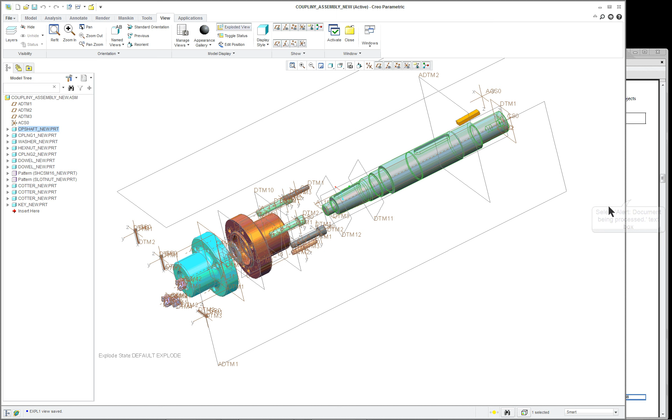We're going to investigate the shaft, the straight coupling, and the taper coupling. First, in this lecture, we'll do just the coupling shaft. All the dimensions are provided for you, but as far as the step-by-step, we'll go over how somebody else approached this project. It's not necessarily the best way to do it. In fact, there are things we'll talk about as poor procedures and maybe not the way you should do it for the correct design intent.

So I'm going to open up the shaft and we'll take a look at it. I'll go to my tools and model player, and as always we'll back it up to the beginning and step through it.

One of the things you'll notice is they did all of this work with one command. This feature actually has too many aspects to it. There are ways to simplify it, and if you don't simplify it, then you should build it piece by piece, and we'll show you what we mean by that in a second. You have the taper here—this is the most important aspect of it.

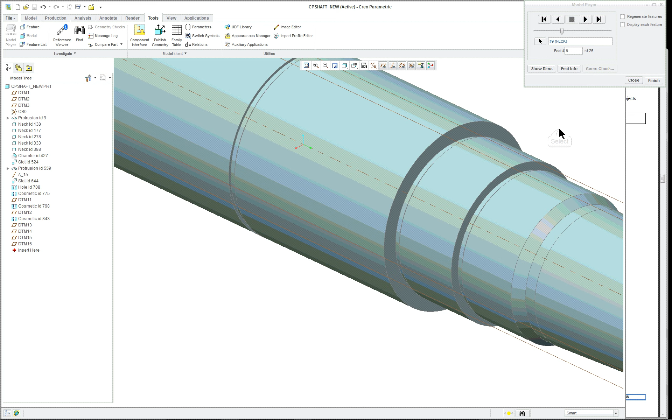So the very first one is a cut called the neck. This is an old style command—it's really just a revolved cut. You can see that was put in here. Same way up in the front here, another neck command. The neck command is really just a fast way of doing a revolved cut. Let's go and refit it. Some of the choices are made for you because it's a default, but we don't have that particular feature turned on, so you won't see that in the commands in the dashboard.

So we have a lot of small items, and then we have this slot that's put in the top. Another cut—this one is a radius actually, a radial cut, kind of an odd way to do it.

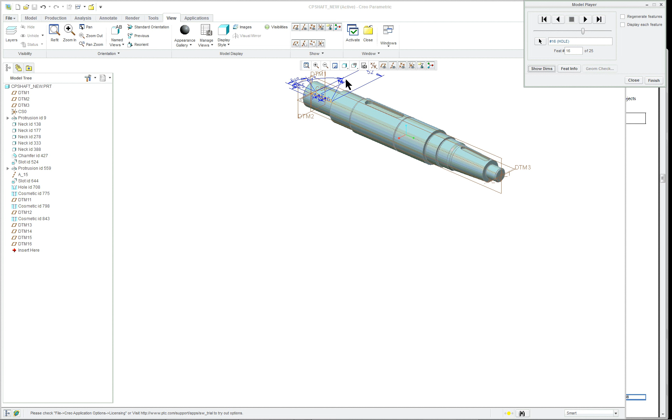And we have our slot here. This will be the one that we have to do a little bit of construction geometry to get. In the back here we have a hole, kind of a complicated hole—you can't use a standard hole here. And that hole has a thread on it.

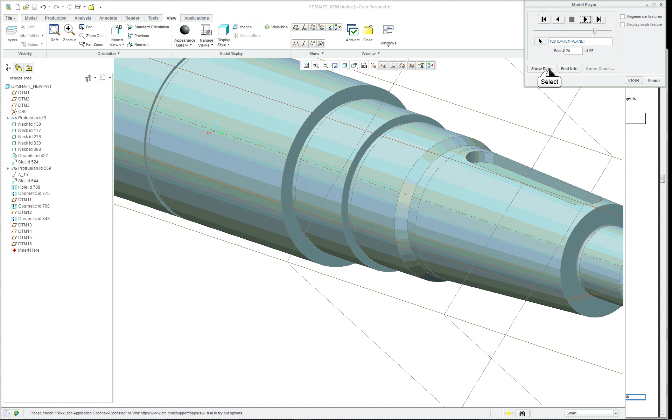We have a variety of other types of cuts and things that we're putting on here. Most of the items are fairly simple, except for maybe the tapered slot here and the hole in the back.

And we have some variety of datum planes that we're putting at the very end. These datum planes are there so that you have the ability to cut sections along the part when you're doing the drawing, and you can see the sections have been provided for you—Section A, B, C—and needed datum planes to pass those sections through.

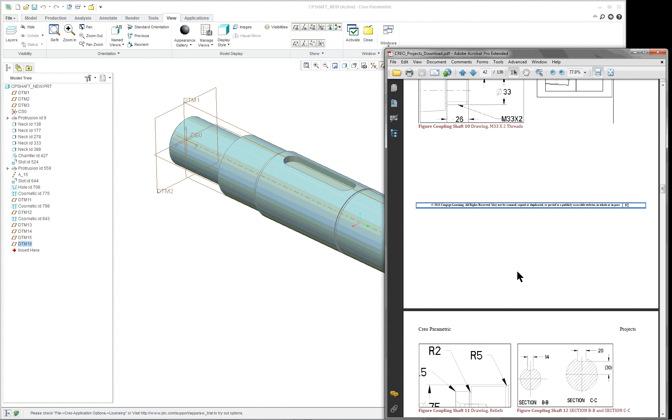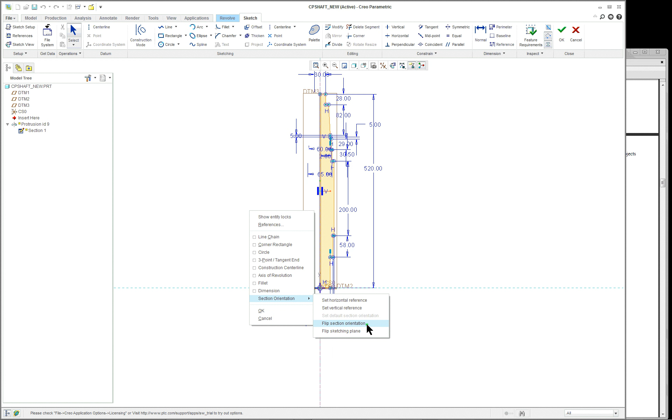All right, so let's look at the first feature. We'll go to the placement, and you'll see this is quite complicated. What we want to do here is turn our section—I have a cold, so I'm sorry about my voice here. We'll click on this, let's see if we can get it to go. Section orientation, set vertical reference—how about this one? All right, and I'm going to close my model tree over here so we can see a little bit better.

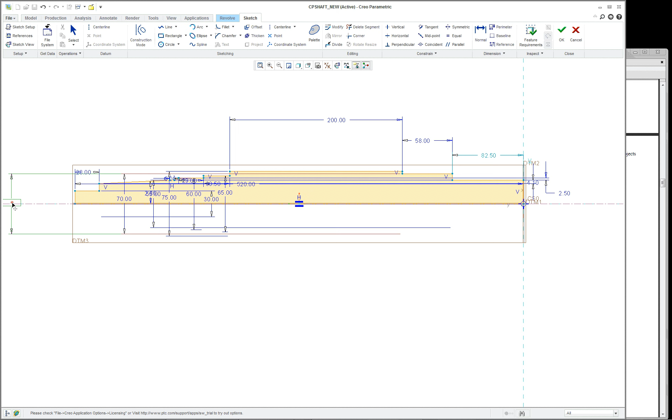Now we'll see we have a lot of diameter dimensions. We do have a lot of stacked up dimensions too, so I'm not saying this is the best way to do it. You're going to have to use these dimensions to create the part, but you also might want to use a better dimensioning scheme and not have so much of a tolerance stack up here. The most important thing here is this dimension, the 2.86—that's one of the most important things. Making sure that this, kind of an odd size to it here, whatever it says in the book, make sure you go by it.

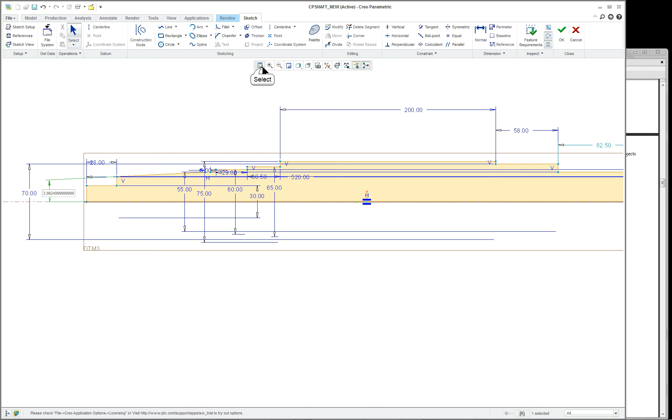And what you want to do is match this angle with what's going to be on the taper coupling. So that's going to be important.

Now, one of the things that people do when they try to do a complicated section is they try to do it all at once. One of the things you can do to alleviate some of the problems, for instance, let's say you started over here and you sketched, but the only portion you finished was... unfortunately, this is all referenced. I wish there was an all, but there isn't. Just trying to back up through here.

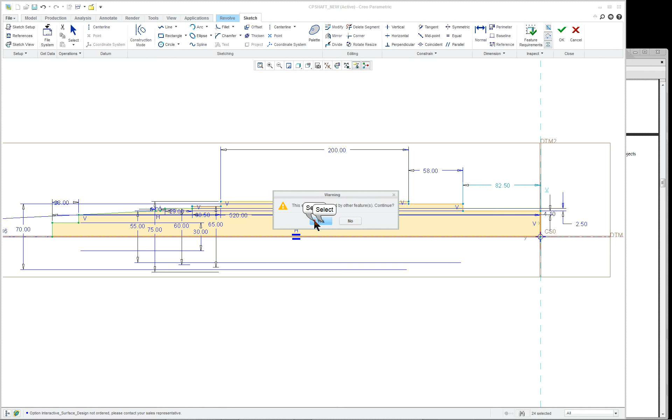And we can see the section here. And I'm going to delete this one. And I'm going to put in from here to here.

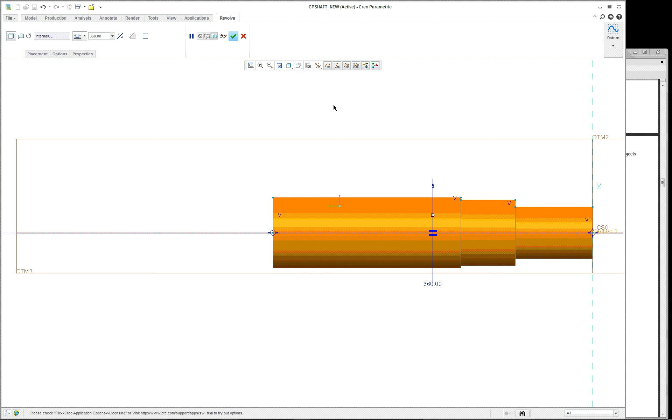Now, the reason for doing this is when you do just a portion of the section, you finish it, come completely out of the command, and then you save it. Then you edit the definition of it, and you do it again. I hate to do that. Well, we can try it. Let's see what happens. So here we are.

And a lot of stuff is not going to regenerate, obviously. But this is what you have completed in the very beginning. So you say, okay, this portion of it is okay. Edit definition, you go back into the section, and then you add the other material on. You continue your sketching. Now, obviously, you're going to have to delete these.

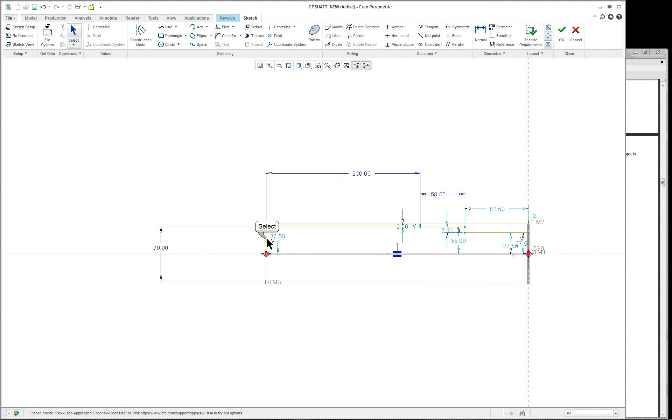So, for instance, I can't remember exactly what it looks like, but whatever it is that you're sketching now, no matter how complicated it is, you finish this off. Adjust your dimensioning scheme as per the requirements of the design. Finish it, and save. Now, what that does is allows you to work incrementally rather than all at one time on a section.

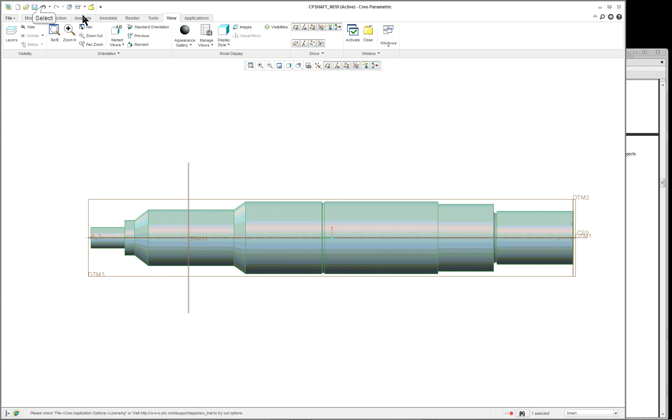So let's see if we can go all the way back. There we go.

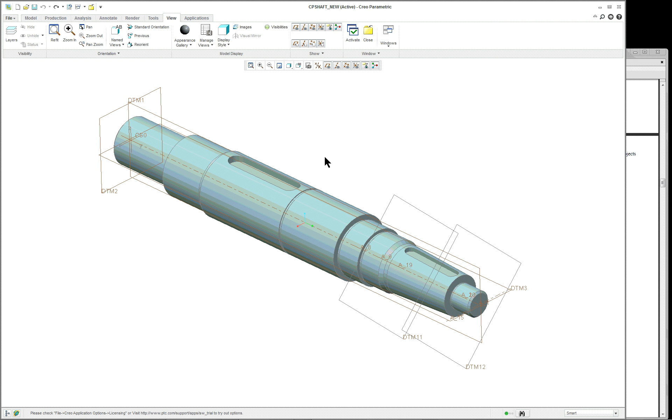You'll notice I have a different default orientation and a standard orientation. And the default orientation is based on isometric at this time, because I set that up in my options. So under model display, I did change this to isometric. After I'd done that, I wanted to see if I could get another good view. So for instance, the view that I created was the default. The default and the standard orientation are the same in the very beginning, but you can reorient the default.

So as an example, if I wanted to, this one is looking this direction. Let's say I wanted one looking in this direction here. And I'm going to go into reorient, and I'm going to click on default orientation and save that. It's going to override the one that's there.

So now I can go Control D, goes into isometric, standard, and then the default it'll go over to here. Let's say this is what I prefer to work with.

So we did the primary feature, the very first feature, most important one in my case. You can see I got a bunch of neck commands in here, which are again a little odd, but we'll investigate some of them.

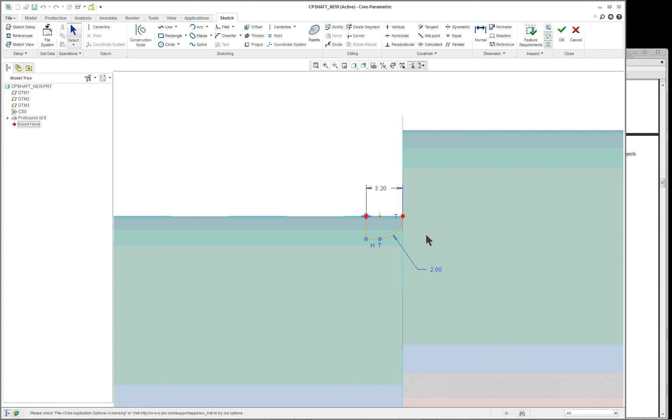So let's go back up here to the very first one, and you can see the neck command comes with some odd menu manager. This is a very old style command, and this is the cut that they put in there. They could have made this as a closed cut also.

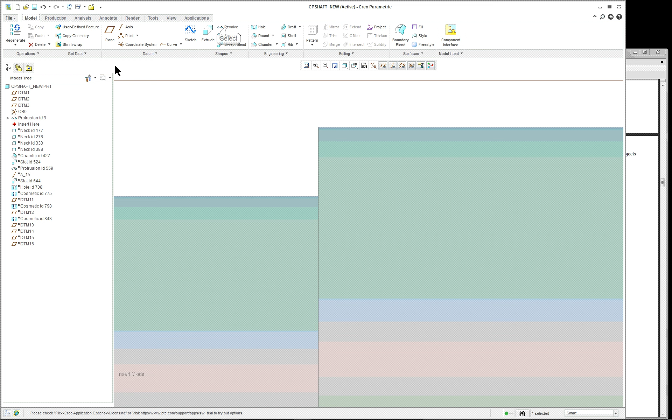So let's just to do one of them, let's suppress that, and let's create a cut. So we're going to do a revolved cut, remove material, and we're going to use the datum plane down the middle here. That's going to be our sketching plane.

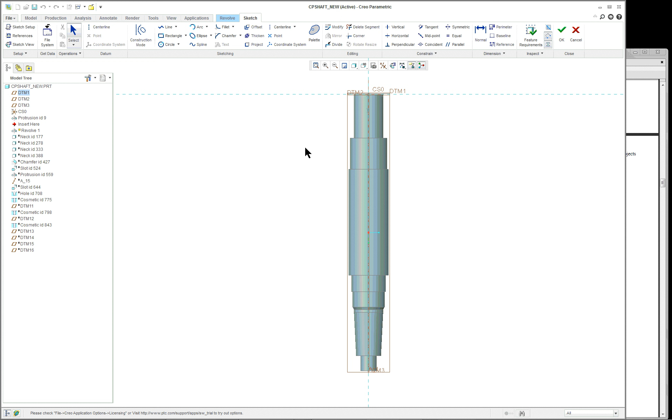Go into the sketch view. I hate this, it's turning it the wrong way for me, at least. Horizontal reference, let's try moving it like this. And to be honest, I forgot where it was. So we'll just do one up in here. It doesn't make any difference where we do this cut.

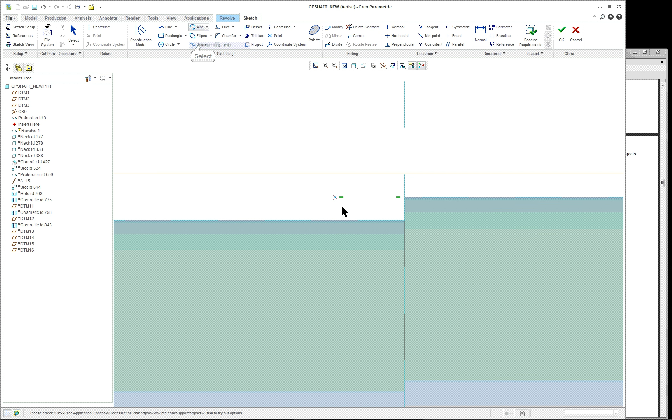So I need some references, and I can select my references, like so. And then I'll need the cut. We'll make a closed section, so I'll use an arc and 3-point. No, let's do an arc and center ends. So center and then end. And then line.

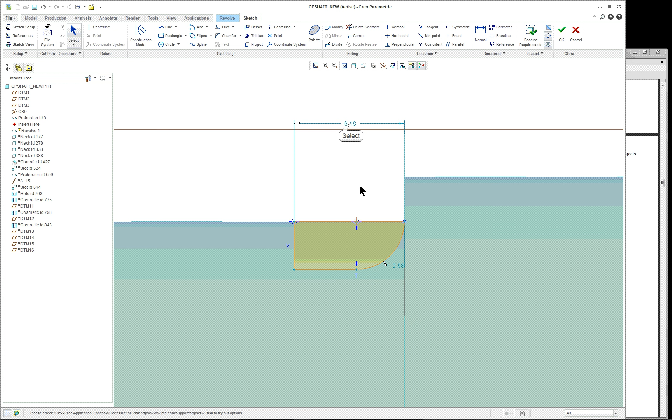And I'll go all the way back because ours will be closed. And you can see that's how we could quickly do our revolved cut. The neck command would have eliminated a couple of those selections for the attributes.

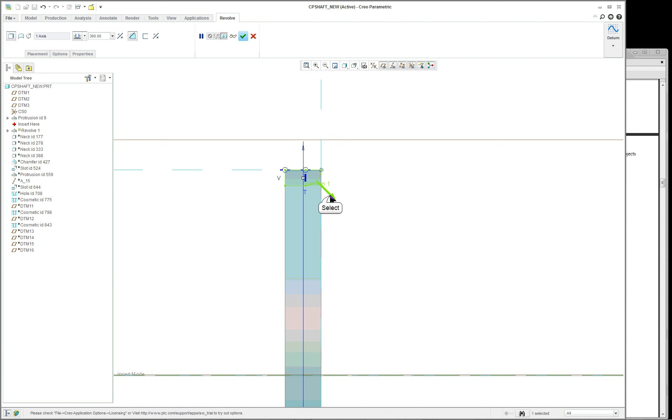I'm not getting it to revolve because I did not do the axis of revolution. So I need this as my axis of revolution. I selected it, and you can see it's going to remove the material. Obviously you don't want to move the material that direction, and that would be the cut. It's relatively simple. You could change the dimensions here, by the way. You don't have to change them while you're doing the actual sketch.

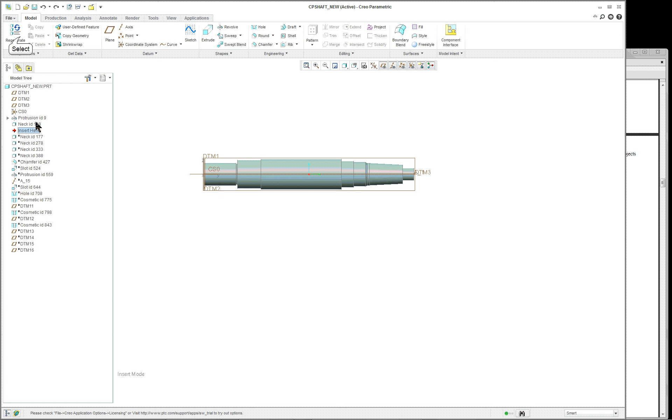So again, let's back that up. Yeah, it was over here, not over here. Doesn't make any difference. So you've got a lot regenerated here. Let's see if I can get this to move.

You've got a lot of different cuts, different styles, but again, they're all pretty much the same as far as your methodology goes. So you use the neck command all along rather than using any revolved cut.

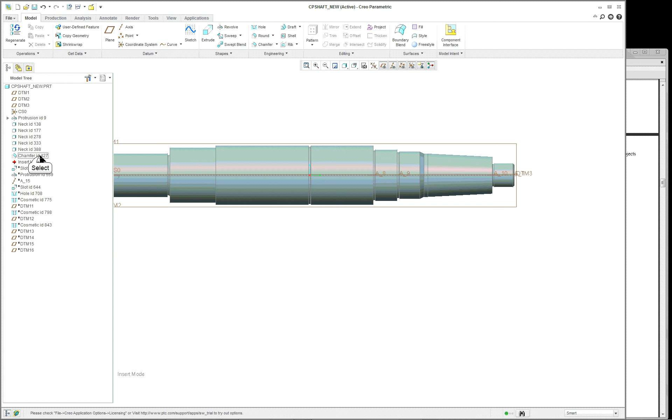We'll go all the way back out to the chamfer, which is at the end here. Nothing particularly important. Now the next one is the slot, and again, this is an old part. Let's look at our file history. We are looking at 1996 again.

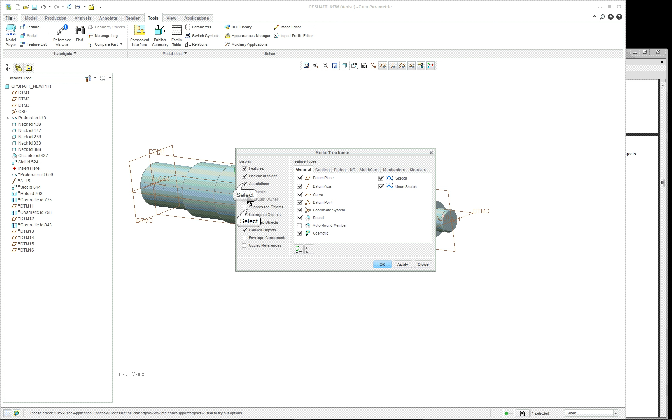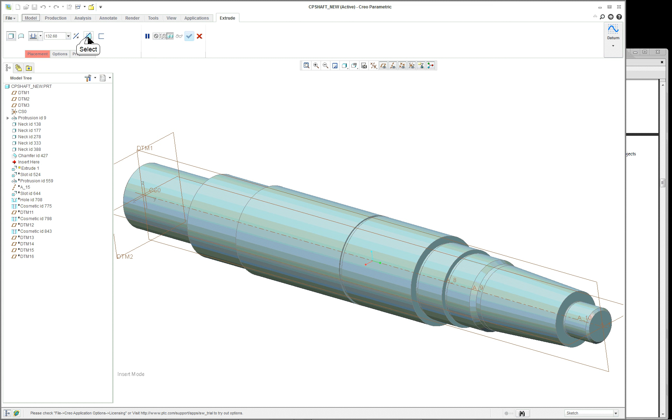So this slot here is going to have some requirements, and one of them is it's going to require that you put a datum plane that's tangent to the position of the slot. Let's turn everything back on there. So let's suppress that. We know we're going to put a slot up here. So the first thing we want to do, we can actually go into the command first, or we can create our datum plane beforehand. In this particular case, I think we'll go into the extrude tool, remove material, and go over here to the datums and put a datum plane in first.

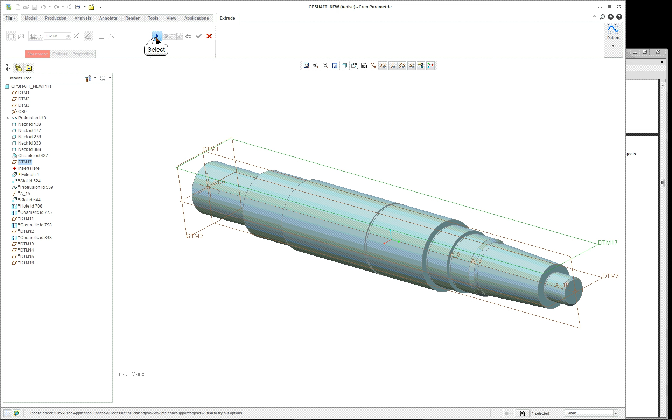So I'm going to pick the surface here, and it says through, and we don't really want through, we want tangent. Then we want to hold down our control key and gather another one. In this case, you could use this one in parallel or this one in normal. Normal came up automatically. Click OK. So that's my sketching plane. Continue with the sketch.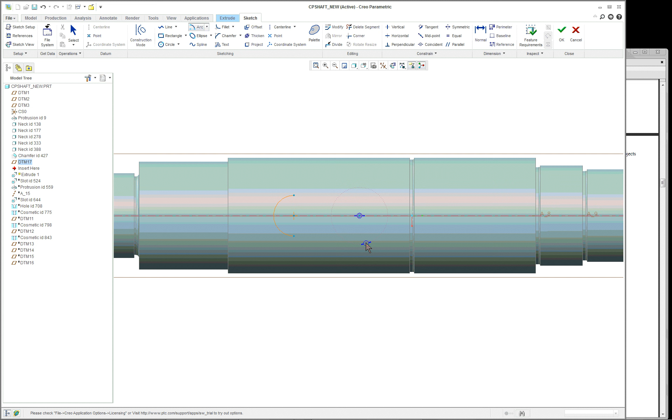And I would put a construction center line down the middle, and then use my arc command. There's a variety of ways of approaching this. You don't have to do it this particular way. You can also use tangent circles, and finish it off with a line.

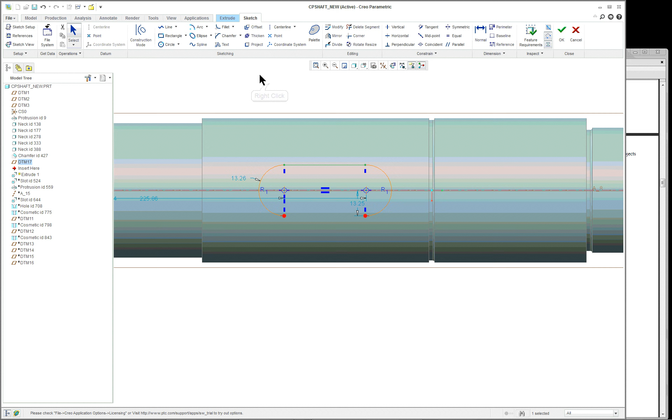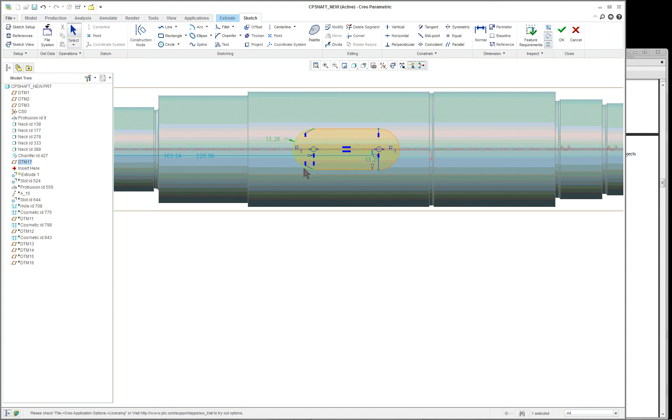Now, if it's not tangent, or the constraints don't work well to control it, then you're going to get some extra dimensions, and it looks like we do have some extra dimensions here. We have a dimension here, which is okay. We have another one over here. So something's incorrect, and you need your distance between the two, so you're going to add a dimension.

But before you do that, you could put your tangencies in there. So that got rid of one of the dimensions. Now you can continue around, but it's saying it's a valid section now.

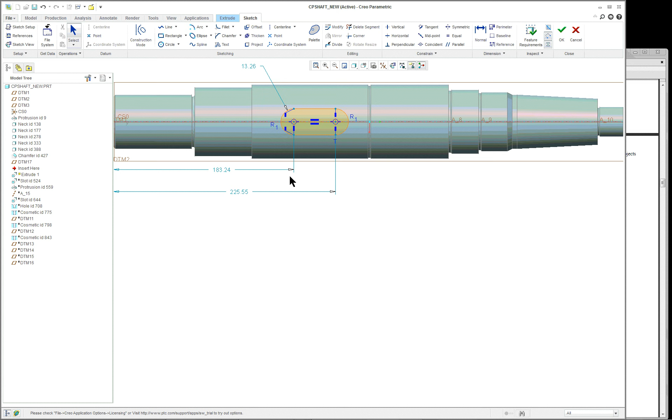Let's move the dimensions out. And again, you'll see, depending on where you're going to dimension from, you probably want the distance between, or in some cases the slot is done from the tangency to the tangency, depending on what type of slot it is. So you could move this around, adjust it, and again, put your proper dimension in there. And you see R1 equals R1, so you only need one of the radiuses.

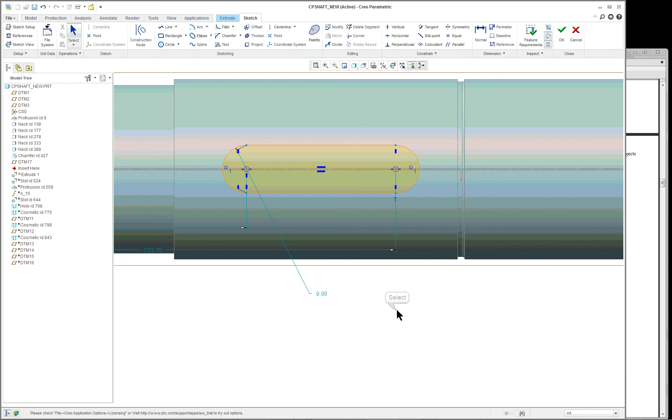Of course, you want to limit how far down it goes, so it's going to be a blind cut. And you're done. So that one's fairly simple.

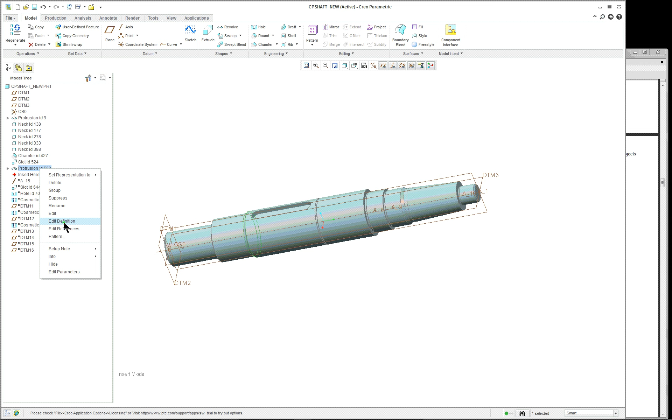I think what we're going to do here is we'll go to our, it says protrusion. Let's see what that one is. Okay, so they added, this is kind of interesting. First of all, I don't think it should be done in this order. If they were doing all the necks, why didn't they do this one also? It's not really a neck, but you'll see what it is.

We'll go into the sketch. It's kind of an odd choice. They put in a section, closed section, with an arc in it. So let's cancel that, and let's suppress it. And let's see if we can find an easier way to do it.

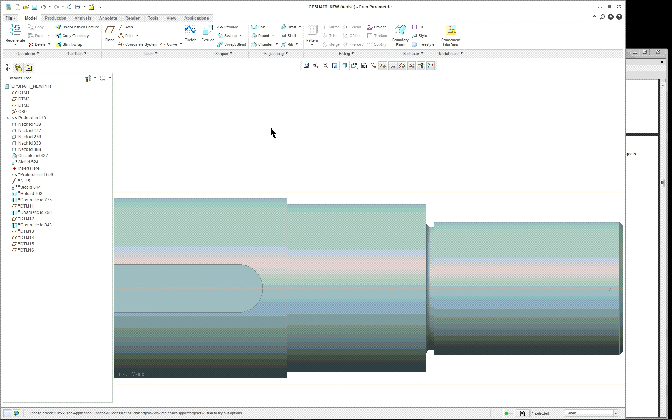Let's go and select our round tool. But this time let's pick the surface, and then the edge. So surface and edge. So that's not going to work.

We're going to have to do a cut instead. Let's try removing this one. So let's pick the edge and the surface. So we got the edge as one reference and the surface as the other.

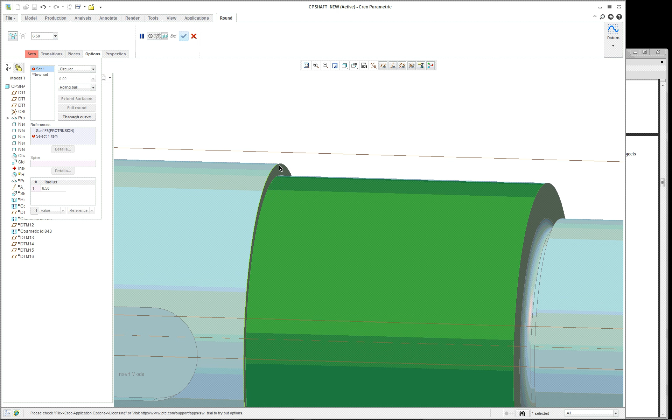So let's do it again. Got your round, look at our sets here. Our references, surface, and surface and surface. I held down my control key, and you see we can actually adjust this. This gives us what we really want, but we could adjust it.

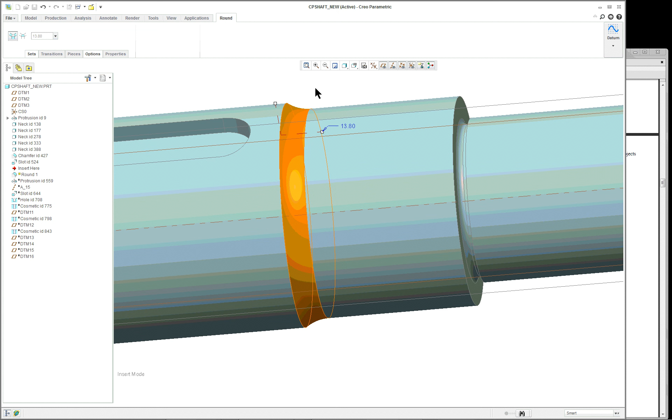There'll be a place where it fails, I suspect. Oh, no, it doesn't, very good. So that would work a lot quicker than the method that they had, which is putting in the protrusion. Now they stuck an axis in here, I'm not sure why or where. Put one at the end. That's a little odd. Again, the methodology, don't have to use it exactly.

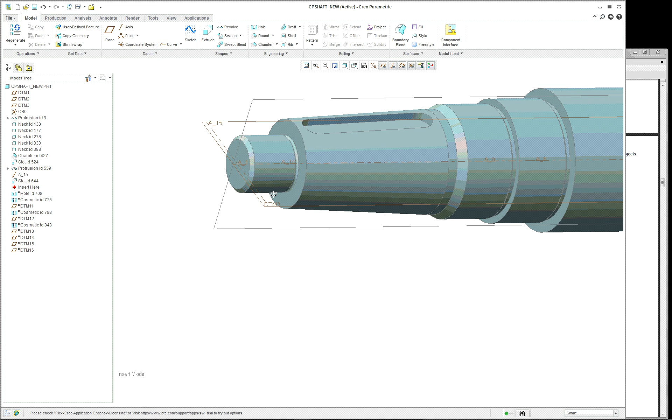Next one is the slot. Oh, they were probably using it for something to do with the slot for some reason. So we have the slot here, and actually I'm going to turn the slot, for some reason I prefer to look at it in this direction.

So let's suppress that. And in this case, let's put the datum plane in first rather than during the command. So we're going to select the surface here. If it's through, we want to turn it to tangent.

We will select, for instance, let's select this one and see if we can just use parallel. No, we want normal, so let's remove that. And that will be normal, 90 degrees perpendicular.

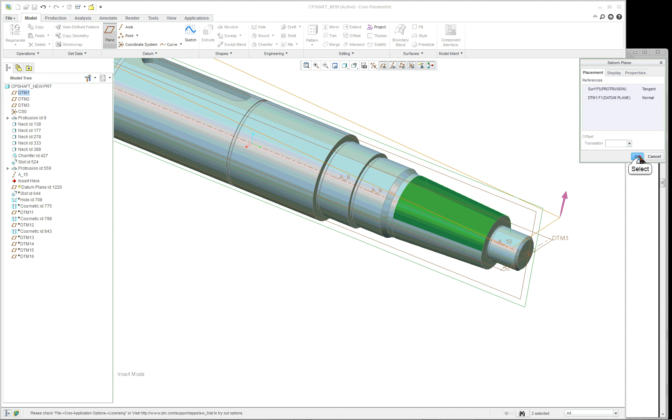You can see the angled datum plane. Now this one is inside, it's external to the command. The other one was inside the command, therefore it was hidden. Here it's not going to be hidden.

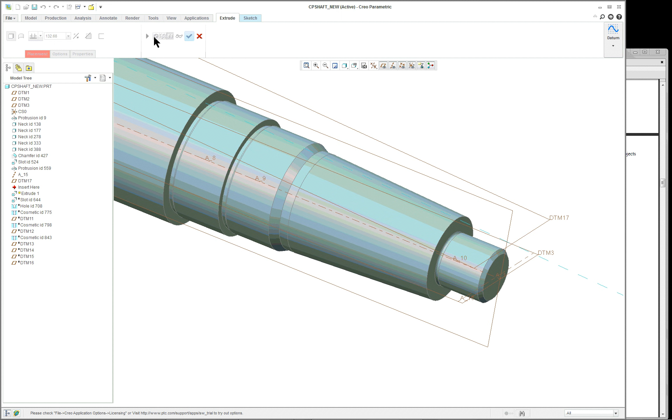So that'll be our sketching plane. We're going to extrude. Actually, by doing it so quickly here on the extrude, you can see I forgot to hit my remove material. So we'll see what happens as we complete this one.

Now everything's at a little bit of an angle because we're looking directly into that new datum plane.

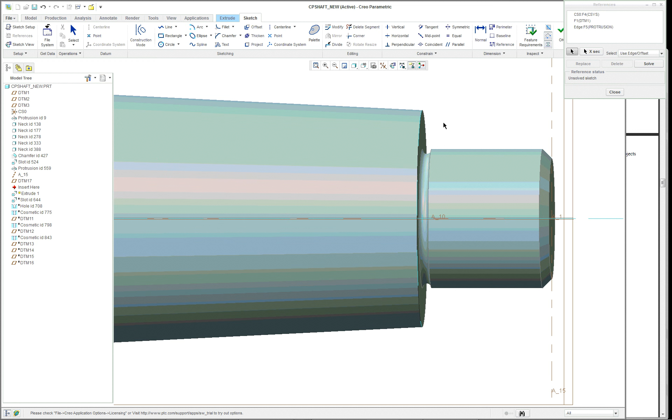We're going to start off with some references. And I want to pick this whole surface as a reference. Right mouse button and pick the edge as a reference also. One or the other will work for us. We've got a reference down the middle.

And let's put in a sketch point right here. Maybe use that.

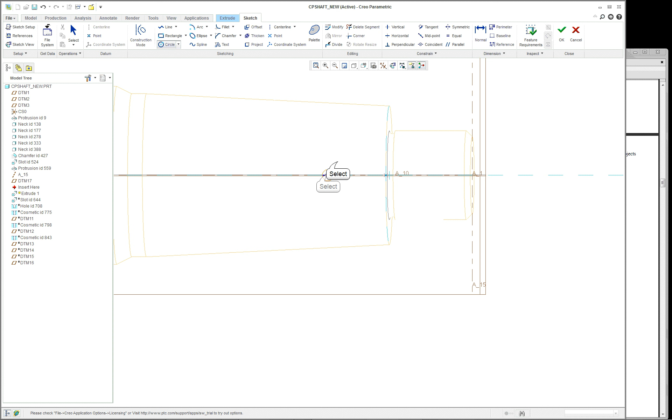And then we'll do our construction, similar to the other one. And we could try something different. We could put in a couple of circles, equal circles, and then connect them with a line. Tangent.

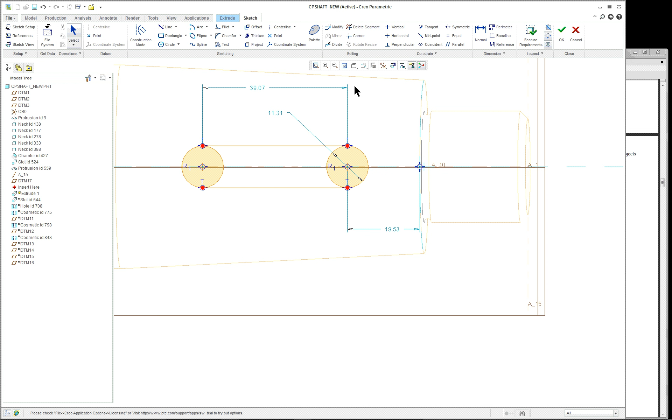Still active. Like so. Then we got to remove this inner arc on both sides. So delete segment, you can draw through this or you can just click on it. Middle mouse button, you'll see that you get that. Now by putting in this reference from the point, it actually dimensioned to it.

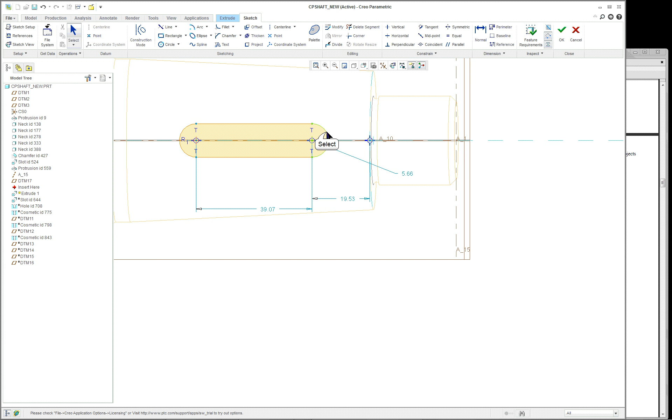If the dimension is not there, then you go from the center to the point here, and that'll be what you need to establish your dimensioning scheme. If you want to go from here to here, you can do that also. So, for instance, you want to go from a point to the arc, and then middle mouse button to place it.

Oh, it gave me that one. It didn't give me the one I wanted. Let's try the other thing. I'm going to delete it. No, it wants it.

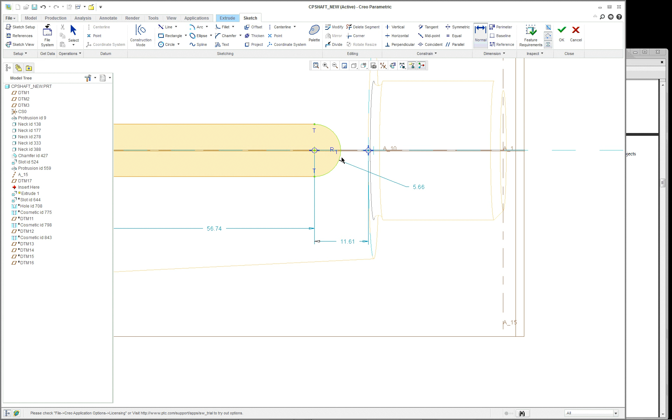So let's go up and add a dimension, and this time let's pick the arc first and then the point. Middle mouse button still did it. I was hoping to get it from this point out here. So I wonder if, well, I'll try one more time.

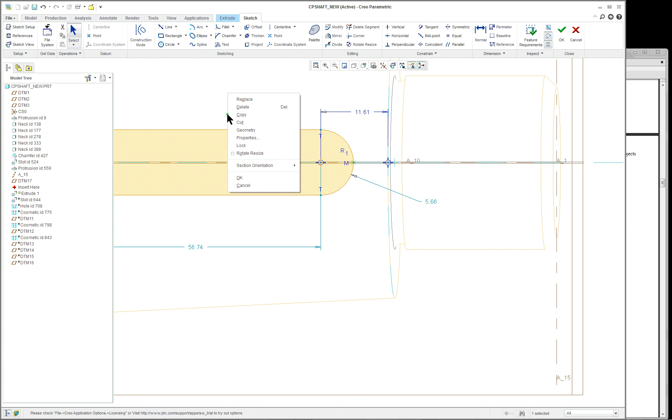Got dimension. I think what we're going to have to do is put a point in there. So let's stick another point right here. And let's put a dimension from point to point. And there's my dimension, okay.

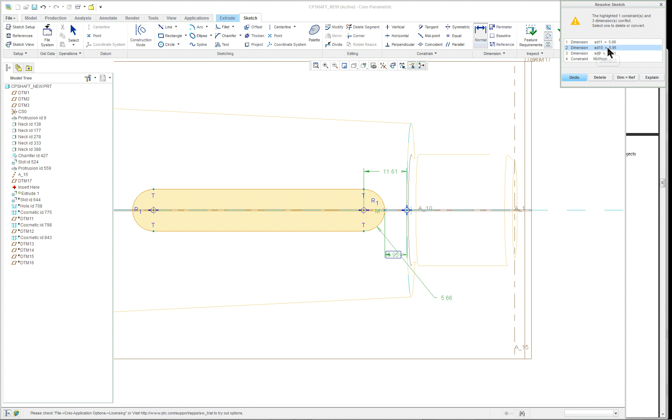Now, if you need a dimension for the radius, you have to add that back in. And it says, which one of these do you want to get rid of? Wants one of these. Oh, they think it's equal. There we go. So we've got too many constraints in here.

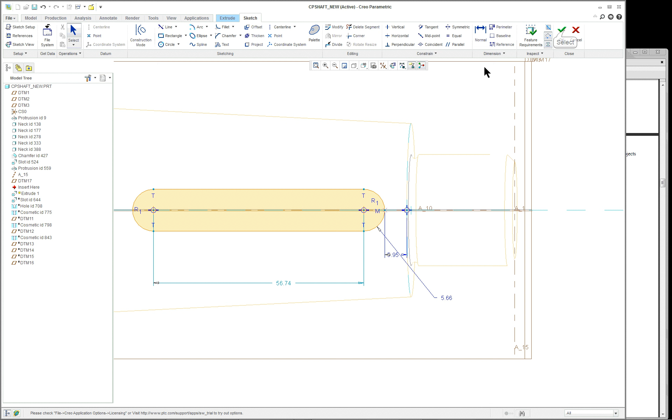R1 equals R1. So here's my radius. All right, now I forgot to remove material. So what happens here? It thinks it's adding. So I will remove material and then bring it down.

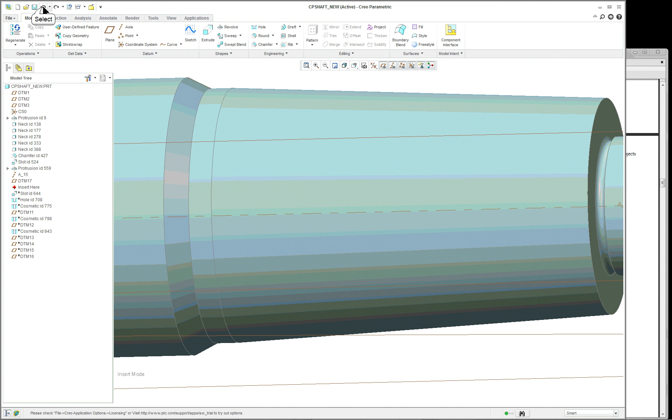All right, undo that one. And activate the hole.

So let's look at the hole. Edit the definition of the hole. And we'll go into the section of it. You can see it's relatively complex. So you have to have a vertical center line or an axis of revolution.

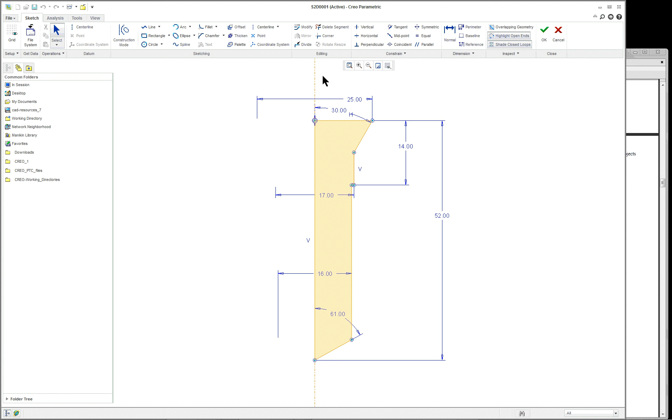Axis of revolution. They changed this. They used to have you put in the center line and then select the axis of revolution. So they streamlined it a little bit. Closed section, obviously, and it's fairly complex.

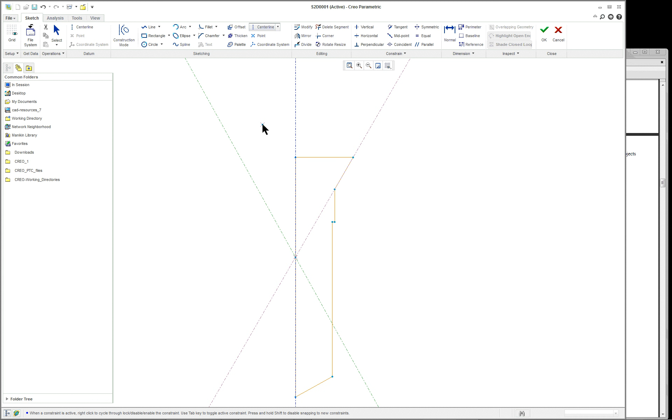Now, the only thing I would say that's incorrect here is that what I would have done instead: I've taken a couple of construction center lines here, like so, and a point, and another construction center line, like so, and maybe one more.

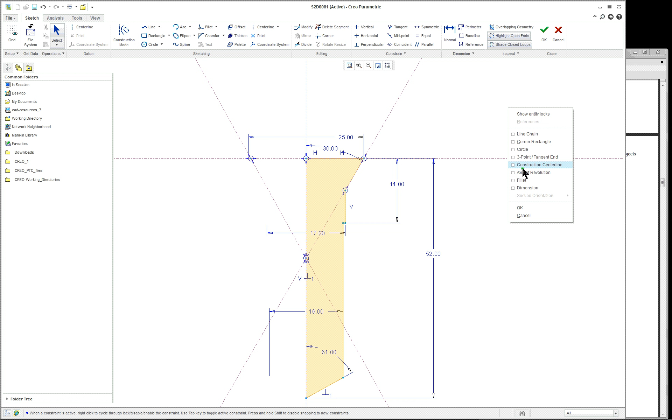And let's put this one down here, like so. And oddly enough, you still have to add a point, like so. So now you got your diameter dimension in there, but if you want another dimension, for instance, the included angle, and get rid of the 30,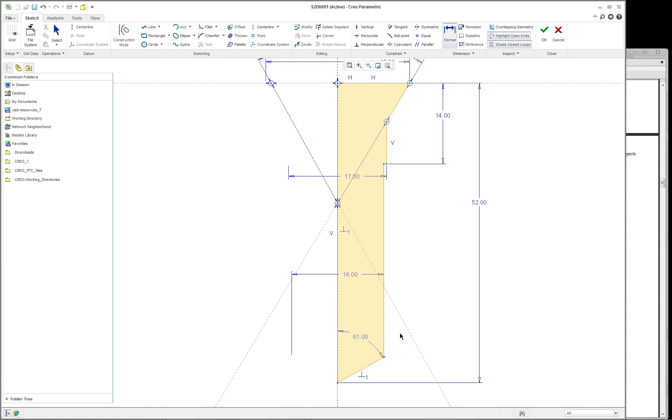that would be a more appropriate. This should be 60, of course. You'd have to do the same thing on the bottom to get that to be an included angle. So it takes a little bit of construction technique, but it's the appropriate thing to do.

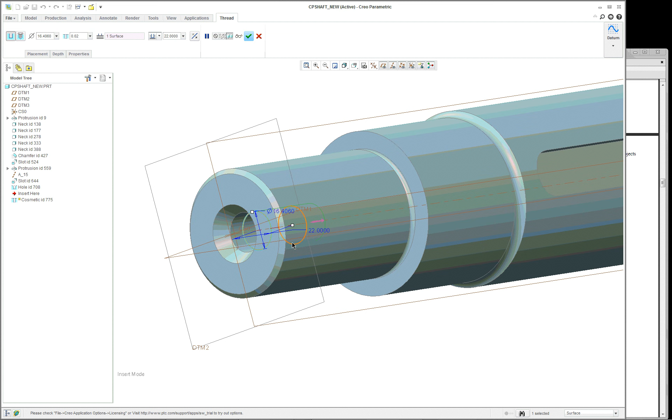Now, you have a cosmetic feature here also. And the cosmetic feature, in this case the thread, cosmetic thread, is only going to go from the lip here a certain depth.

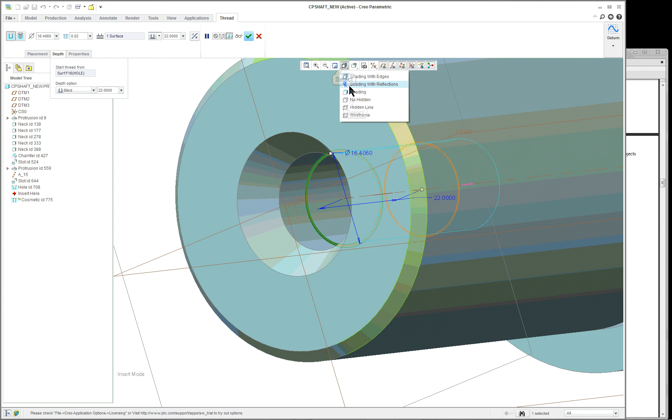So you're going to have to select that where it starts and then depth. So the start from here is this lip here, and it's going to have a certain depth. We go over to our no hidden line. We can see it a little bit better.

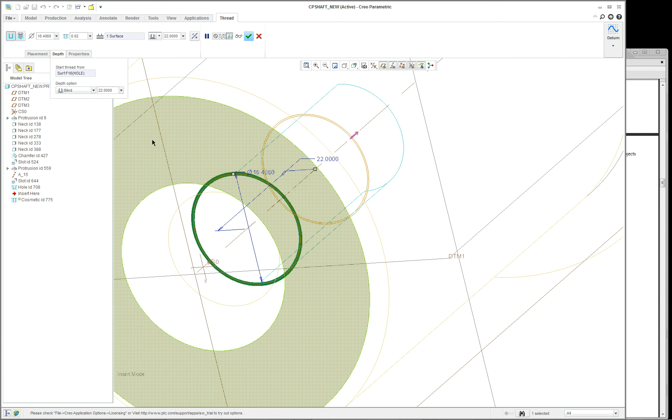If you turn off your spin center, then it will spin from the position that you're selecting. When you have a long or a large part, you need to do that. So here's your thread.

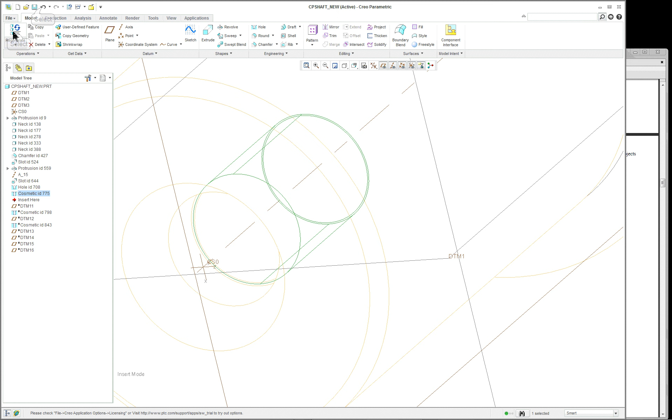And let's go to the command locator. Let me do it. Back out a little bit. Let's go to my shading. Doesn't allow me to pick in there, maybe because I've got so many things suppressed. But if you can't find the command.

Then what you need to do is go into, you can look through, oh, I've accidentally found it, come out, cosmetic sketch, cosmetic thread. So you can type in here to find that command.

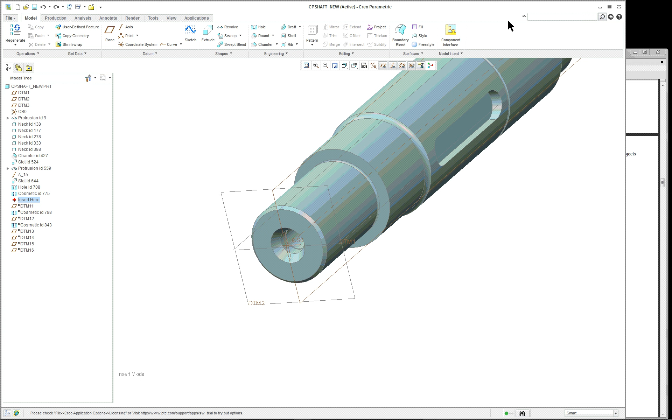Next, I added a few datum planes and another cosmetic thread. And this one is for the shaft here.

And again, if you turn off the shading, you'll see the cosmetic thread is a magenta colored surface, no volume to it.

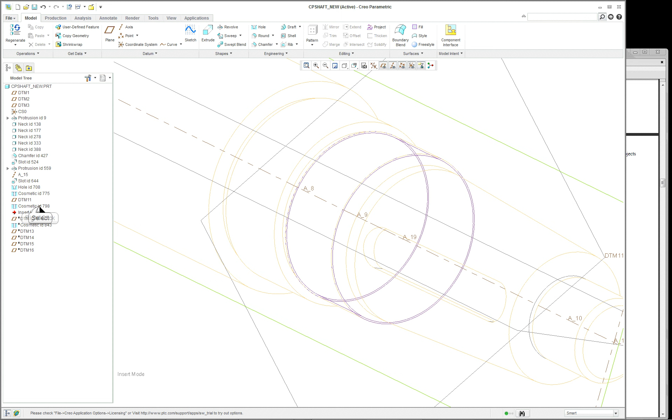In this case here, they put a datum plane in to start it, and then they have a depth going. It could have gone up to this little lip surface here. Maybe they did.

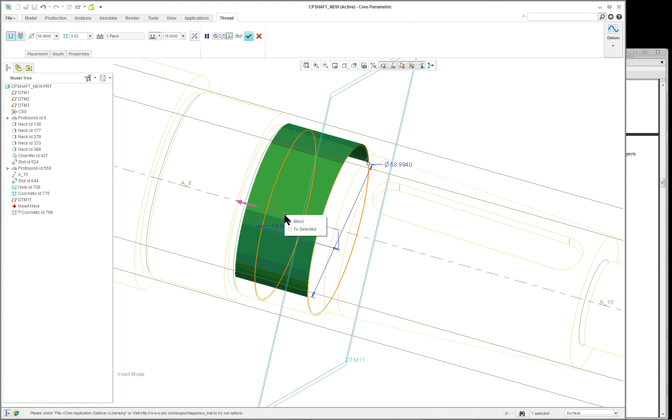To select it, let's try that. It's because it's a round cut. They wanted to go to the datum plane, or they wanted it to be blind. That's why they did that.

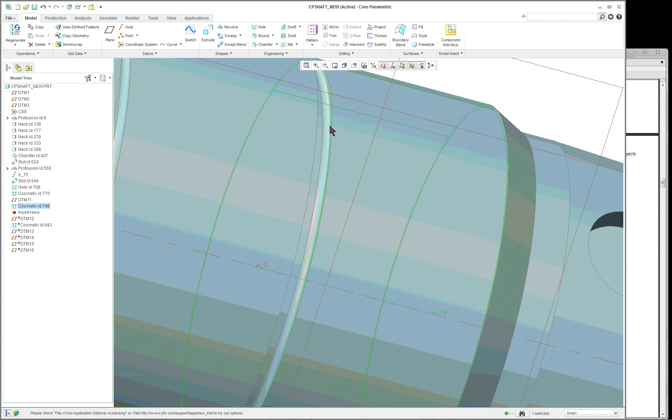I was hoping there would be some sort of an edge there, but there's not. That's the round. So to go up to there, they'd have to have something to click on to show where the thread is going to go to.

Put another datum plane in, and then they put another cosmetic thread in. This cosmetic thread is here. And they started from the surface. Threaded surface is green here. The depth, start plane, the datum plane here.

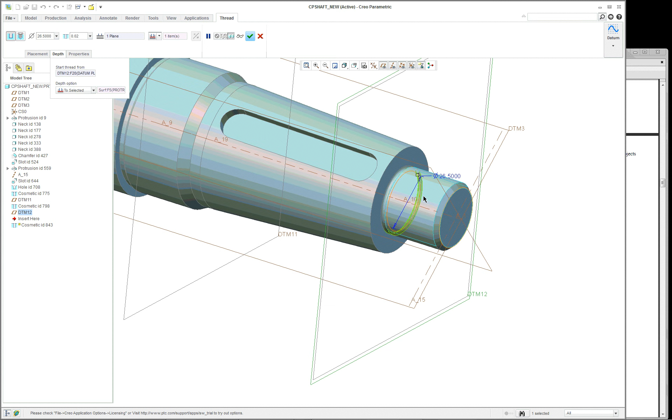Again, let's see. Now they can't use that round, so they put a datum plane through that edge. And they use that as the start. And then to selected, they went all the way out. Probably should have put another datum plane in here through this edge and gone to that datum plane instead.

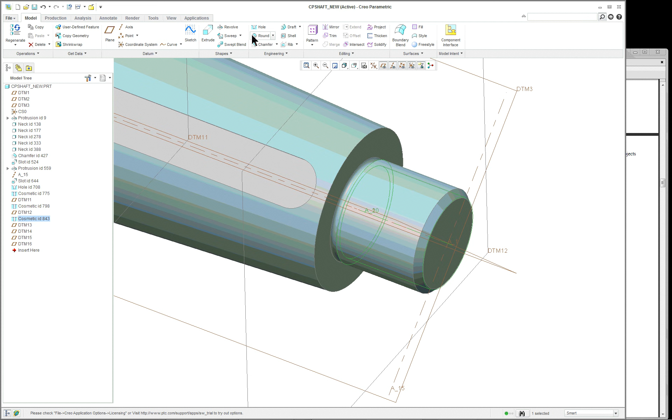See how far back I can go here. And default orientation. And again, these last ones are there so that you can cut sections. Last datum plane, so you can cut sections through here so that you can have your views and you're creating your sections.

It's kind of an odd name. You're not supposed to name anything like this. Must have been a reason you did that. That name, this AA, will actually show up on your drawing, so it's not a good idea to do that. This ends the shaft lecture.